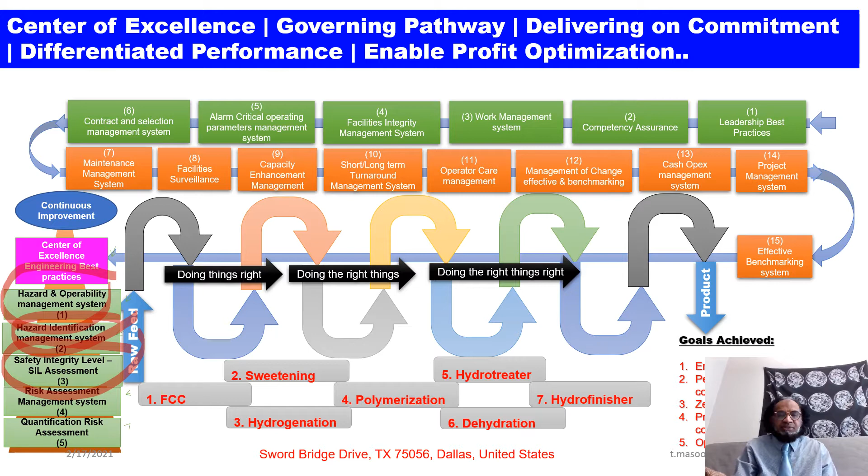Center of Excellence: governing pathway, delivering on commitment, differentiated performance, enabling profit optimization process. Okay, we can see the first here.

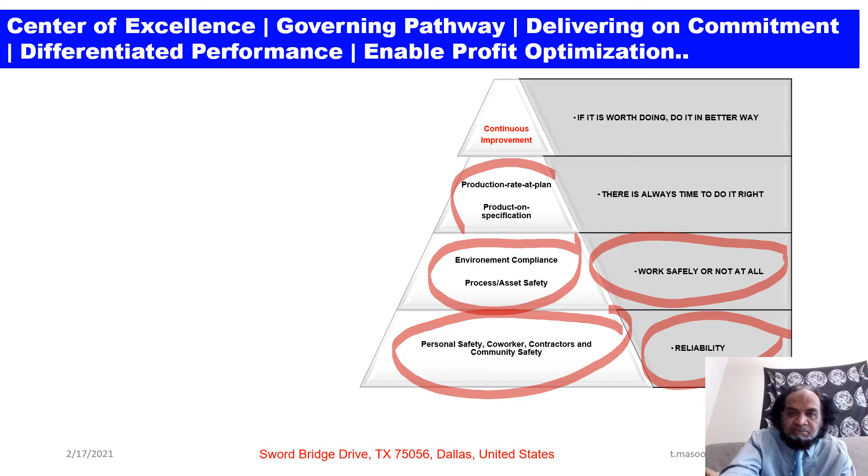The safety of personal safety, co-workers, contractor, and community safety, and it must be reliable. Second, environment compliance of process and asset safety, work safely or not at all. Production rate at plan or product on specification, there is always time to do it right. Continuous improvement: if it is worth doing, do it in a better way.

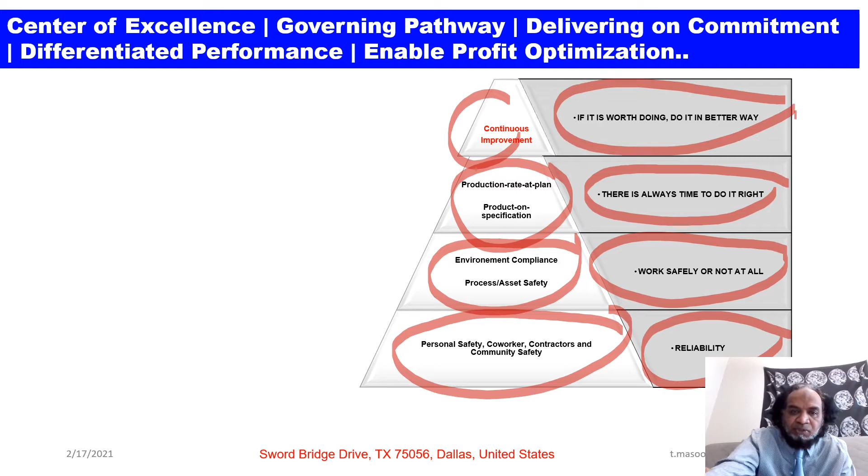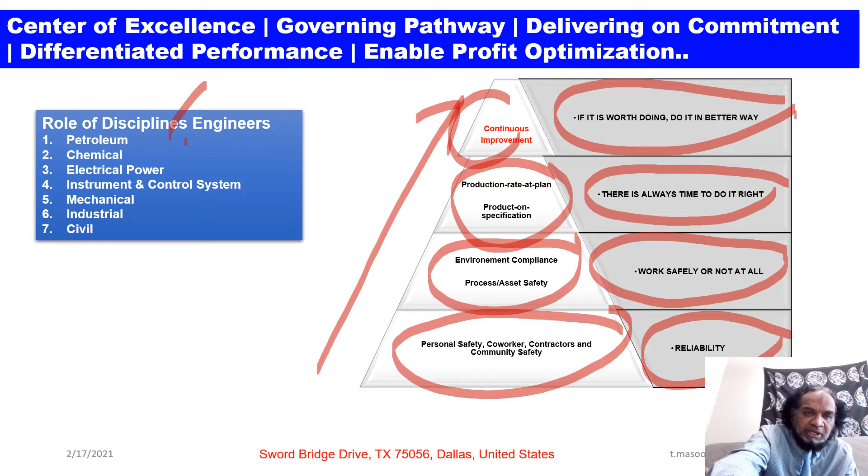This is my working parameter. So in order to achieve these goals, we need to have different discipline engineers: petroleum, chemical, electrical, instrument, mechanical, industrial, and civil.

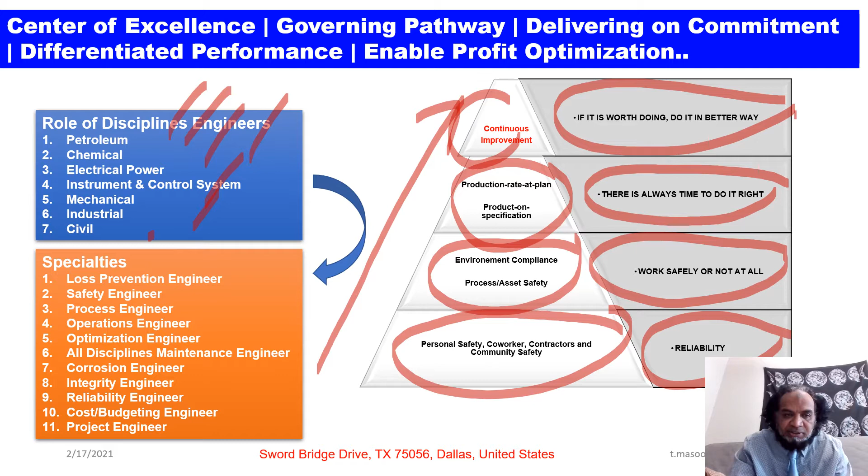The specialty: loss prevention, safety engineer, process engineer, operation engineer, optimization, all discipline maintenance engineers, corrosion engineers, integrity, reliability, cost, budgeting engineer, and project engineer.

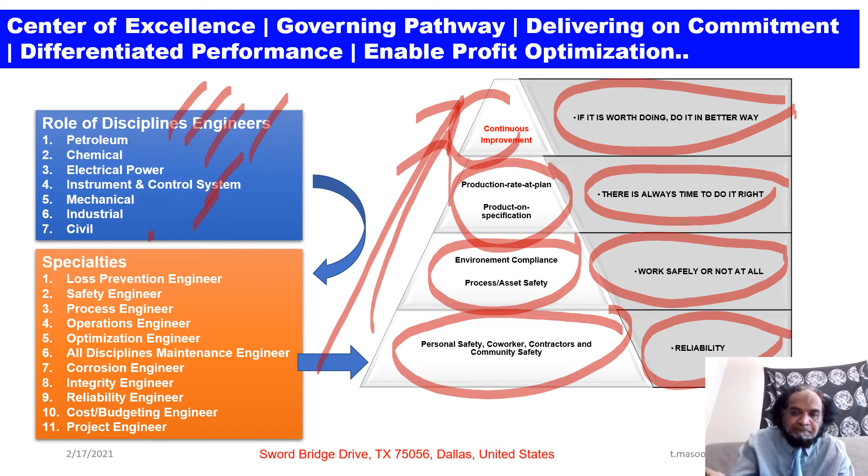In order to achieve the personal safety, co-worker, contractor, and community safety, as we have discussed. In order to achieve what we have to do, Center of Excellence for the engineering best practices.

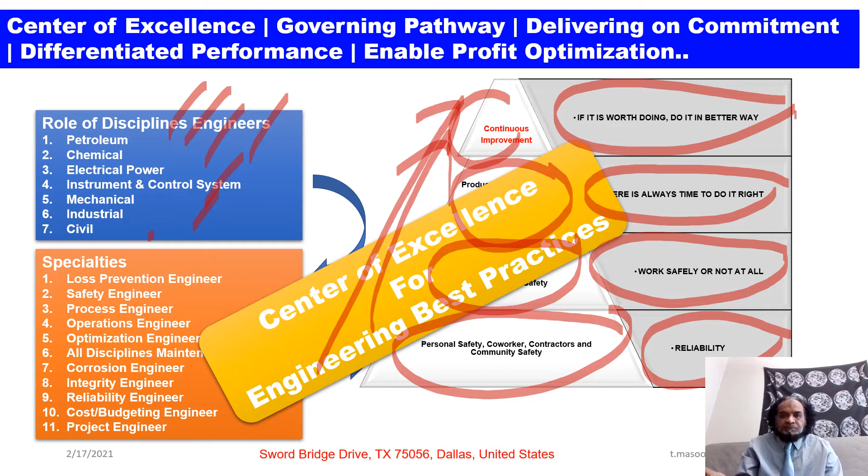SIL, the Center of Excellence objective: first we're going to discuss, then scope here, then application and policy, and how to implement it, SIL, Safety Integrity Level.

This is my forward message. This document has been developed by corporate HSE support department, reviewed and edited by the corporate quality management system department, and circulated for review by user department before being endorsed by oil and gas company management for use as per the company guidelines of policy for Safety Integrity Level to determine and address issues.

This document is published for the oil and gas companies, operation department, contractor, and consulting utilizations, and also reflects as far as possible current corporate requirements, taking into account the available industry best practice and the applicable latest national and international codes and standards.

This document is subject to periodic review to reaffirm its adequacy or to conform to any changes in the corporate requirements or to include new developments in its subject matter. It is recognized that there will be cases where addenda, data sheets, or other clarifications need to be attached to HSE publication to suit a specific application or service involvement.

As such, the content of the document should not be changed or re-edited by any core company or the contractor, suppliers, agent, etc. Any data or clarification entailing a major change shall be brought to the attention of the custodian department. All comments, views, recommendations about the documents, forward to me.

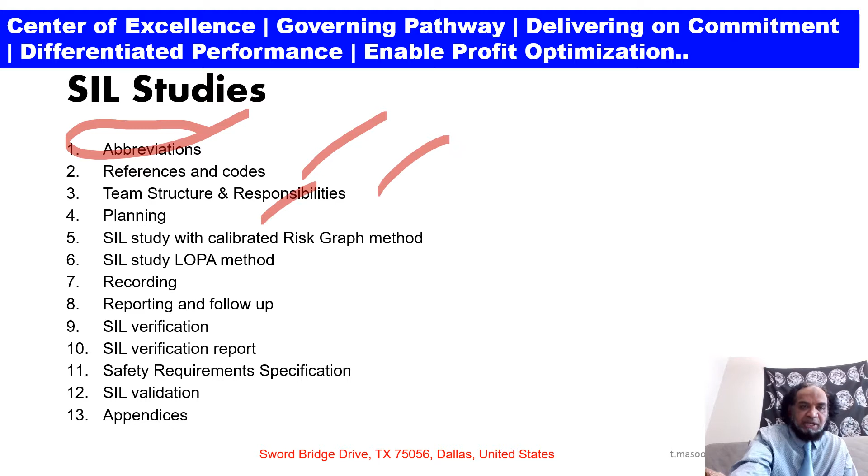Today we are going to discuss first abbreviations, then references and codes, team structures, planning, SIL study with calibrated risk graph method, SIL study LOPA method, reporting and follow-up, SIL verification report, safety requirements specification, SIL validations, and appendix.

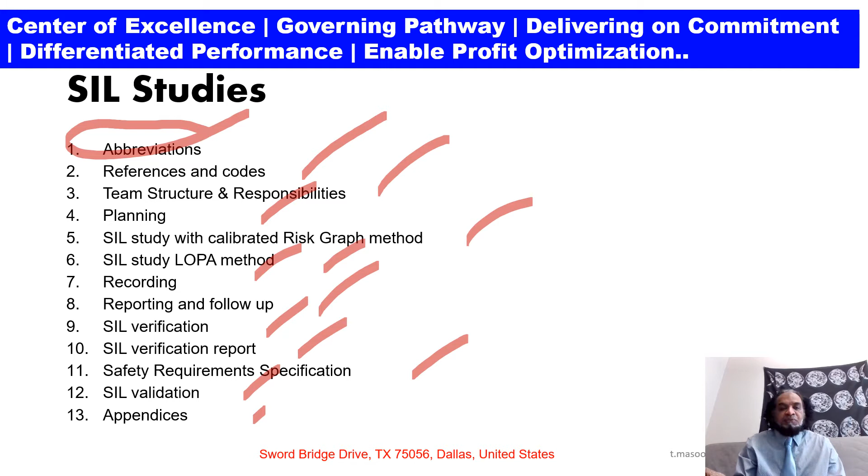These 13 points we are going to discuss over the next couple of days.

Okay, SIL introduction. Safety Integrity Level (SIL) studies an analysis which aims at determination of the appropriate reliability level required from the elements of the safety instrumented functions (SIF) identified in prior safety study, that is HAZOP. The approach of this guideline is to remove the uncertainty regarding the safety integrity, cost effectiveness, and availability requirements, reducing over and under engineering in traceable manners.

SIL study is a method to record the SIF for a project development and document the expected reliability level. SIL study provides a basis for the future maintenance and operating strategies. SIL study shall be conducted during a FEED phase and EPC phase in accordance with engineering health and safety plan.

or as required by the outcome of the safety studies of a project. SIL assignment is based on the amount of risk reduction that is necessary to mitigate the risk associated with the process or to a tolerable level. All of the safety instrument system (SIS) design, operation and maintenance choices must then be verified against the SIL assigned.

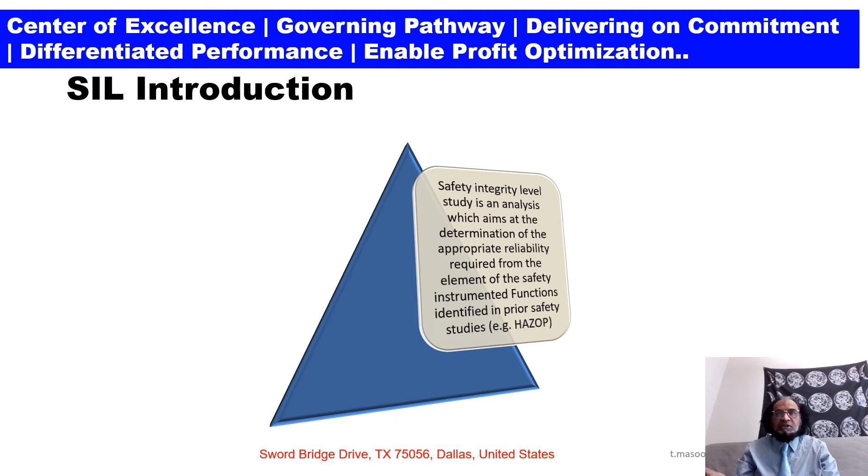Okay, so next is the scope. To specify the structure, responsibilities and technique of the safety integrity level. It demonstrates, as the guidelines detail, the structure, responsibility and techniques of the safety integrity level study using a calibrated risk graph and a LOPA methodology.

Calibrated risk graph methodology shall be primarily followed for a SIL study. However, the SIL levels assigned with a 3 and above using risk graph methods shall be further verified by LOPA methods. LOPA method can also be used when the SIL assessment team using risk graph method are unable to reach consensus agreement on the target SIL level.

The guidelines also detail the requirement for the safety requirement specification, SIL verification and SIL validation for a project.

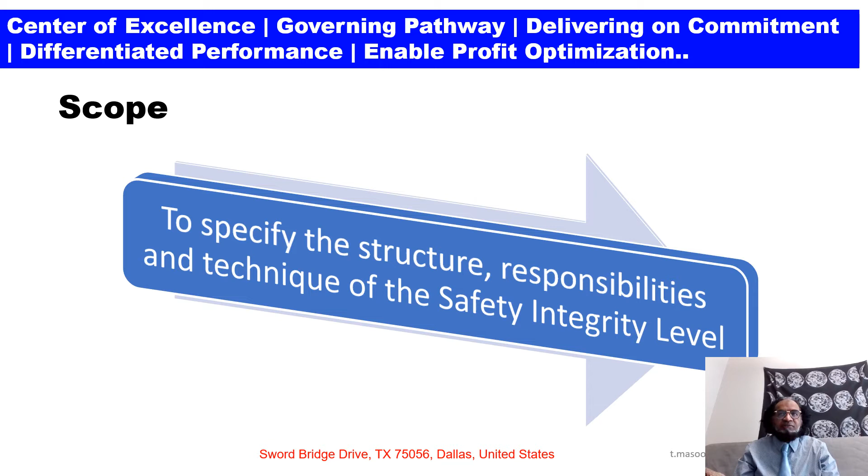Okay, application. The SIL study of the project shall cover all safety instrumented functions (SIF) in the process, vendor package systems, utility systems and fire and gas systems associated with ESD systems where there is a potential for hazard to human safety, environment or assets or production loss.

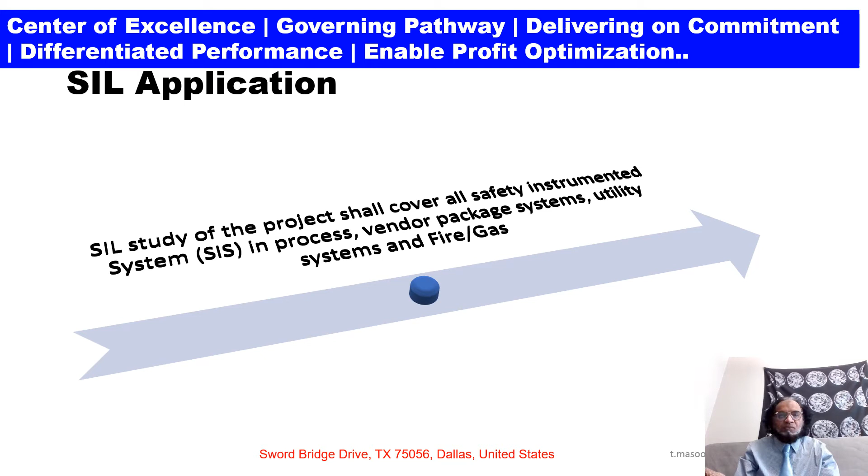Okay, next is the policy. SIL policy: all oil and gas companies are committed to protect the health and safety of its employees and others that may be affected by its activity and to give proper regard to the conservation of the environment. The company policy is to conduct its activity such that it strives toward an incident-free, secure, safe and healthy workplace.

Safety studies and reviews shall be performed during the course of a project or a modification to an existing facility. This is to identify, qualify, quantify and establish that design safety measures shall provide adequate protections and mitigate any risk involved with the proposed project development or the modification.

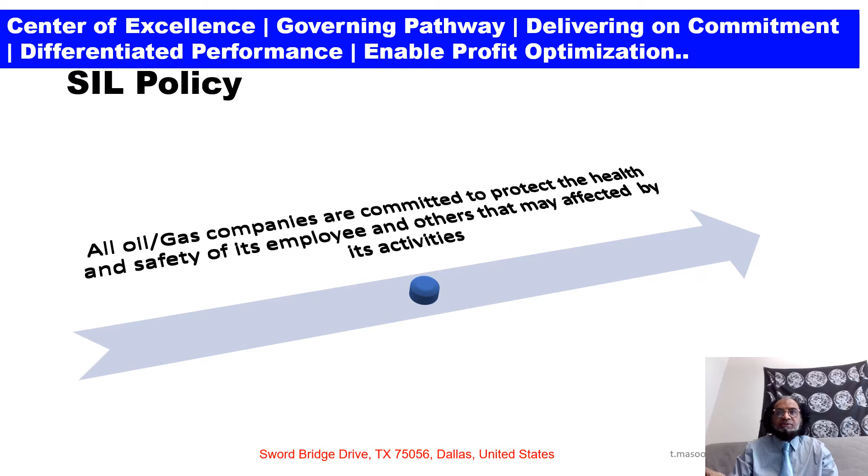SIL terminology here. The first is BPCS, a basic process control system, a combination of sensor, logic solvers and final elements which automatically regulate the process within normal production limits. The BPCS provides a control of process in the desired manner. Okay, the next is the cause, and then company, oil and gas any company, and then the LOPA system.

First, the cause: the factor contributing alone or in combination with others to release of hazards. In this guidance, it sums to the demand scenario triggering a SIF. Okay, then LOPA, that is layer of protection analysis: a process of evaluating the effectiveness of independent protection layers in reducing the likelihood or severity of undesirable events to meet organizational need.

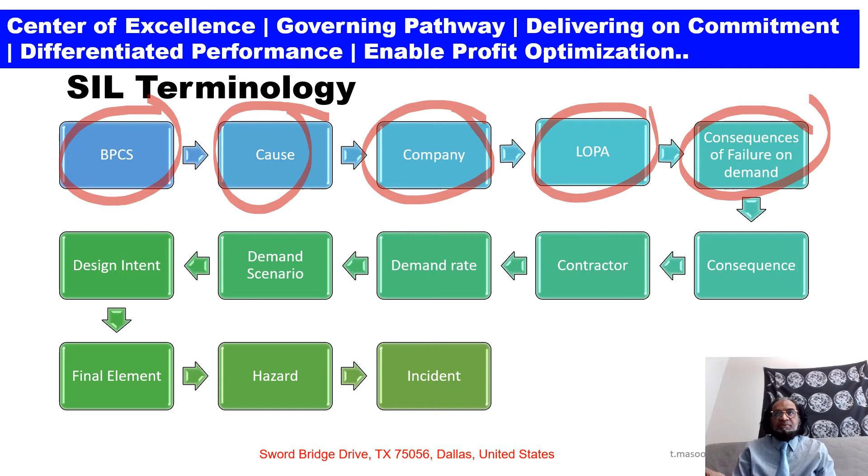Okay, the next is consequence of failure on demand: escalation events that happen after the failure of the SIF during the solicitation, affecting personal safety, economic loss, environment effect. Okay, then the consequences.

Okay, the consequences are the result of the failure of control, or the absence of control to prevent an incident, that are usually expressed in terms of injury, loss or damage to people, assets, production, environment, and reputations. That is,

next is the contractor here. A firm which has entered into a legally binding business agreement, contract to supply a product or provide services in a company. The term is also sometimes applied to suppliers who are available to provide services but are not currently in a contractual relationship.

Okay, so next is the demand rate: the number of times per year that the hazards event would occur in the absence of the safety instrumented functions under consideration. Okay, then the demand scenario.

Demand scenario: the set of conditions that trigger a SIF action. Then there is the design intent of the final element, and the final element itself. Design intent is the reason why the SIF is set, it has a purpose. The final element is a device which manipulates a process variable.

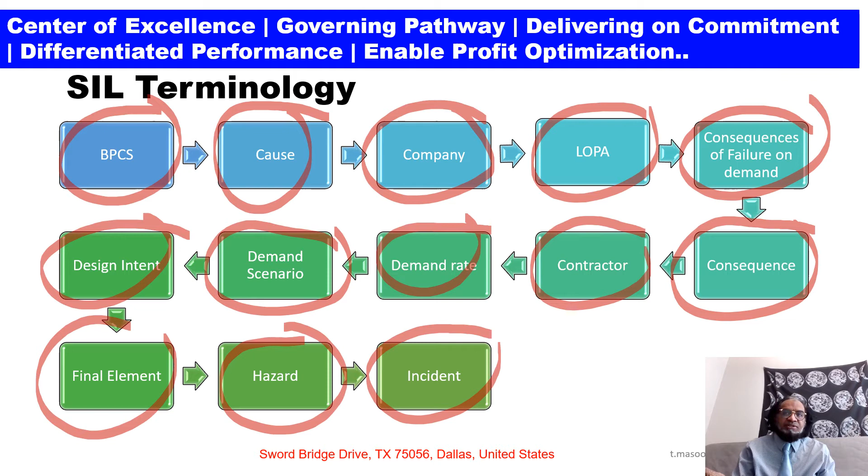Next, layer of protection analysis: a process of evaluating the effectiveness of independent protection layers in reducing the likelihood or severity of an undesired event, to meet organization needs. Next is the licensor.

A licensor, or a process licensor, means each of the companies which have granted or will grant to a company a process license, or have provided or will provide the corresponding license basic engineering package (BEP) during the FEED project.

Next is the logic solver: the elements of BPCS or SIS that implement one or more logic functions.

Occupancy: the probability that the exposed area is occupied at the time of the hazard event, determined by calculating the fraction of time the area is occupied at the time of the hazard event.

Next is probability of avoiding the hazard: the probability that an exposed person is able to avoid the hazard situation which exists if the SIF fails on demand. Next is the probability of failure on demand.

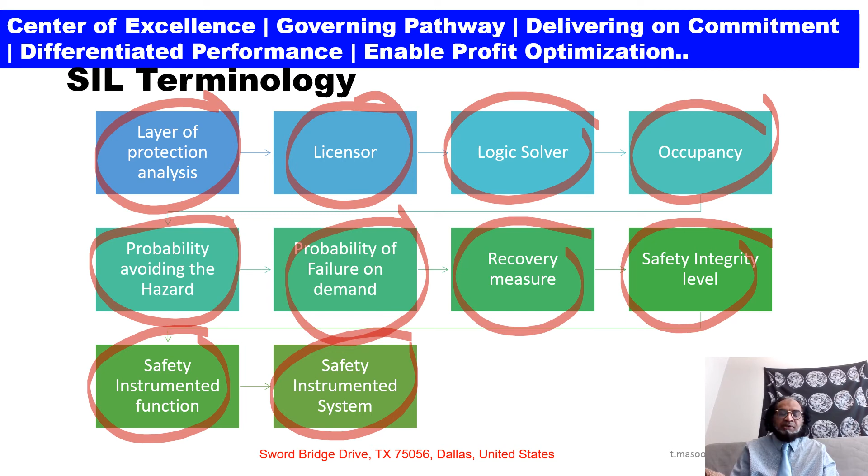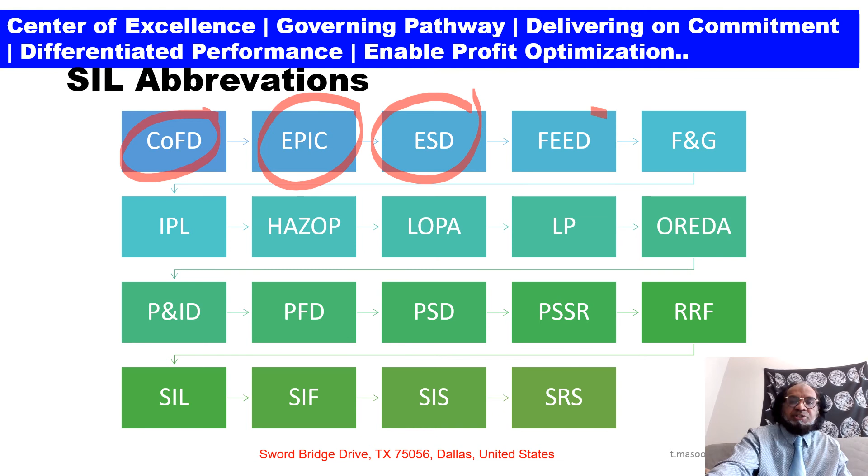SIL abbreviations: first is CoFD, consequence of failure on demand. Second is EPIC, engineering, procurement, installation and commissioning. ESD, emergency shutdown system. FEED, front end engineering design. F&G, fire and gas systems.

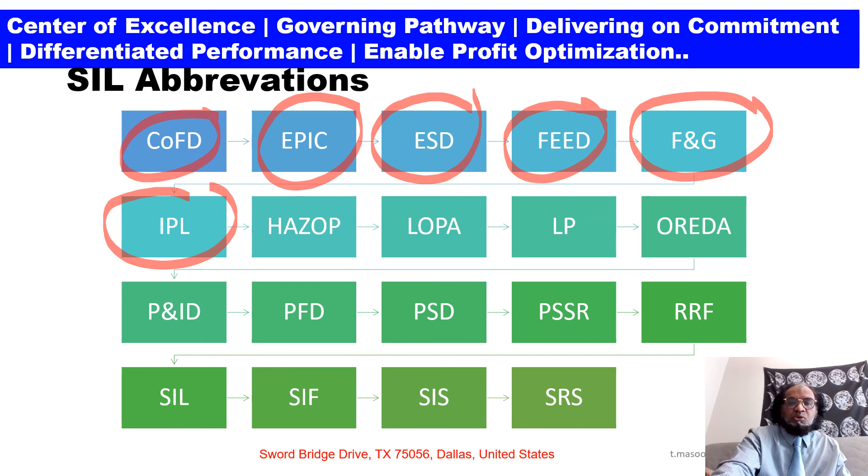IPL, independent protection layers. HAZOP, hazards and operability study. LOPA, layer of protection analysis. LP, loss prevention. OREDA, that is offshore reliability data.

P&ID, piping and instrument diagram. PFD, process flow diagram. PSD, process shutdown. PSSR, pre-startup safety review.

RRF, risk reduction factor. SIL, safety integrity level. SIF, safety instrumented function. SIS, safety instrumented systems. SRS, safety requirement specifications.

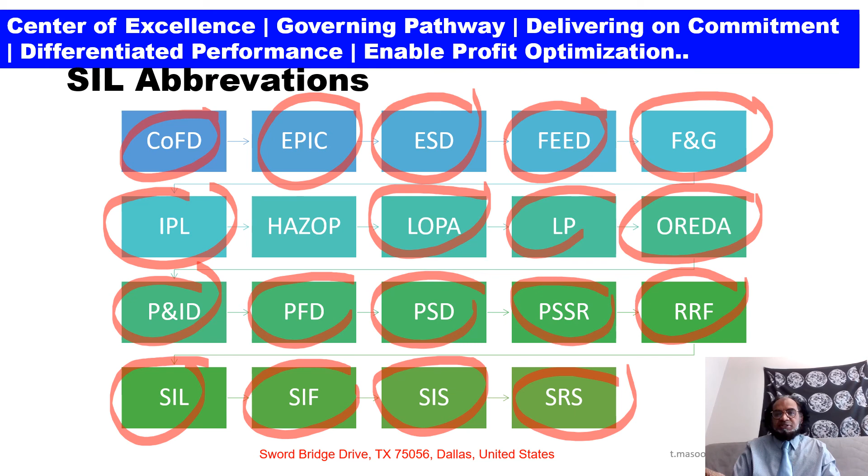For SIL-related documents, we can further review: corporate philosophy for fire and safety, philosophy of HSE risk management, philosophy of health safety activity project, interdepartment procedure engineering, management of health and safety in capital projects, etc.

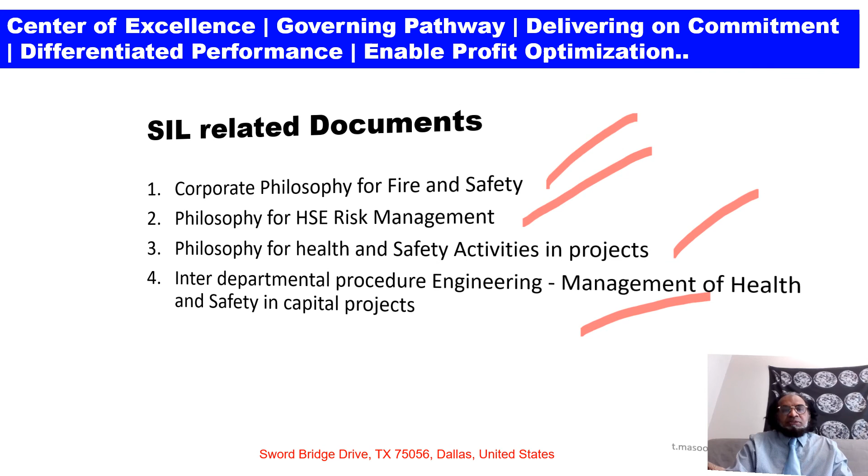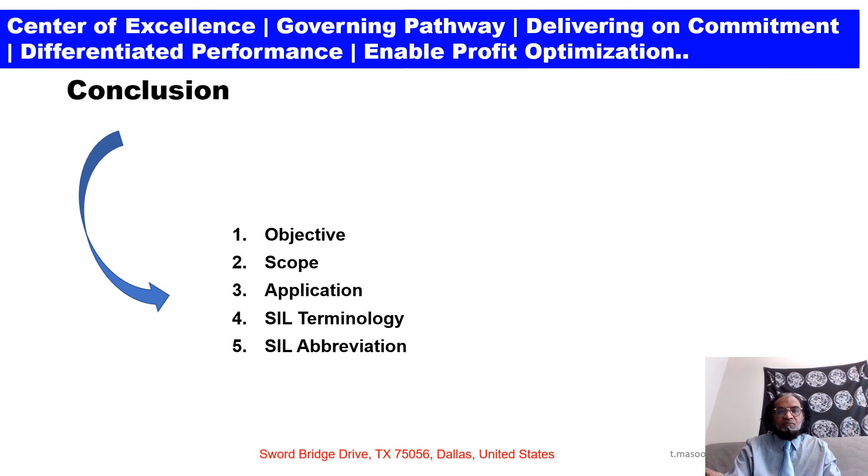Today we have discussed objectives, scope, applications, SIL terminology, and SIL abbreviation. Next topic, we are going to discuss team structure and responsibilities, and reference standards and codes.